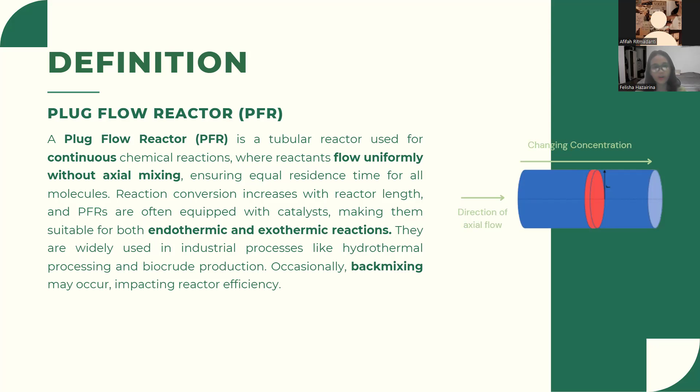Reaction conversion increases with reactor length, and PFRs are often equipped with catalysts, making them suitable for both endothermic and exothermic reactions.

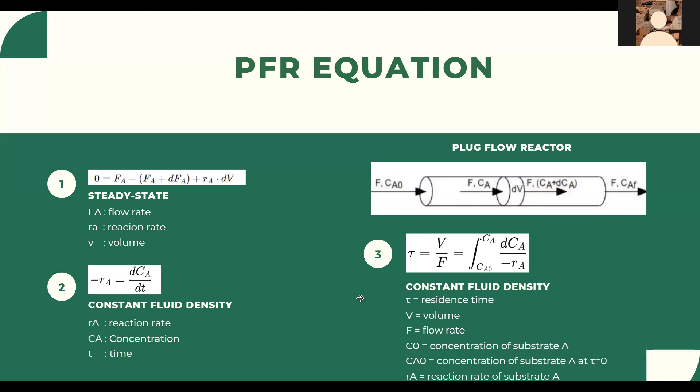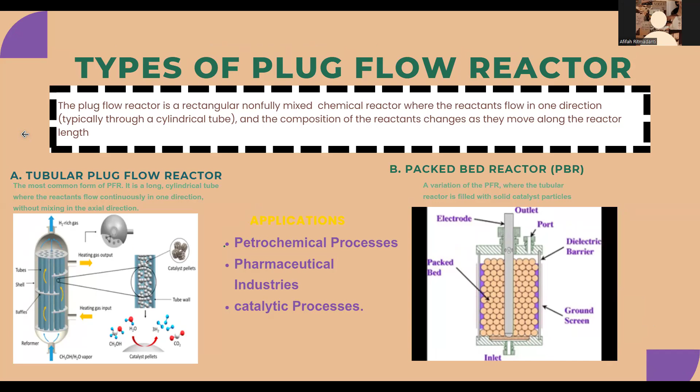Continuing from where my friend stopped, we are going to look at the types of the plug flow reactor, particularly after discussing the reactor equation and what a plug flow reactor is. With a little bit of emphasis, we know that a plug flow reactor is a rectangular, non-fully mixed chemical reactor where the reactants flow in one direction, and the compositions of those reactants change as they move along the reactor length. So the length is a main predeterminant in how the plug flow reactor performs. There are many types, but I'm going to discuss 4.

The first among them is the tubular plug flow reactor. As the name suggests, this is a type of reactor which has tubes inserted inside the reactor, and it is the most common form of the plug flow reactor. It is long, cylindrical, and the reactant flows continuously in one direction. That makes it unique because it has no mixing, and the direction of flow is the axial direction.

If you look at the picture there, you'll see that at the bottom we have methanol entering into the tubes. We have the heating gas input, and they flow through the shells and the tubes. The hydrogen, which is the main gas, will be trapped at the upper end. And you have the catalyst pellets inserted in these tubes, and they act within the tube wall. So the main point is that they flow within this reactor in the axial direction without mixing, which makes it a tubular plug flow reactor.

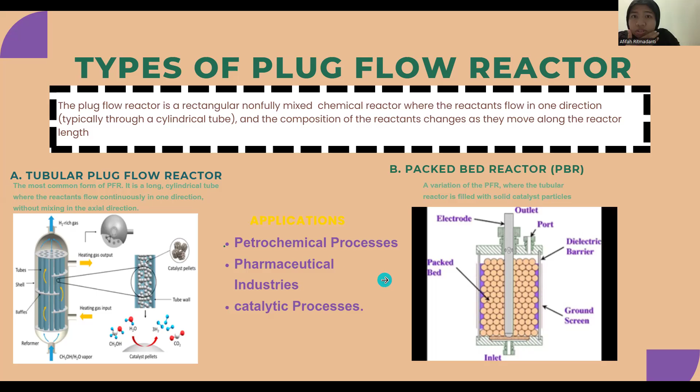The other one is the packed bed reactor, PBR. I think this should be a repeat. It's a mistake, I suggest. But they are the three main types of reactors which work in this circumstance. Where do we use them in that scenario?

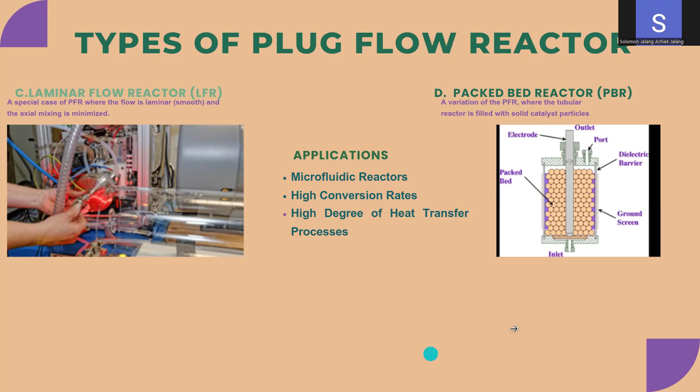Okay, the next one is application of PFR. One, it is widely employed in various industries: plug flow reactor, chemical manufacturing, petrochemical industry, and pharmaceutical production.